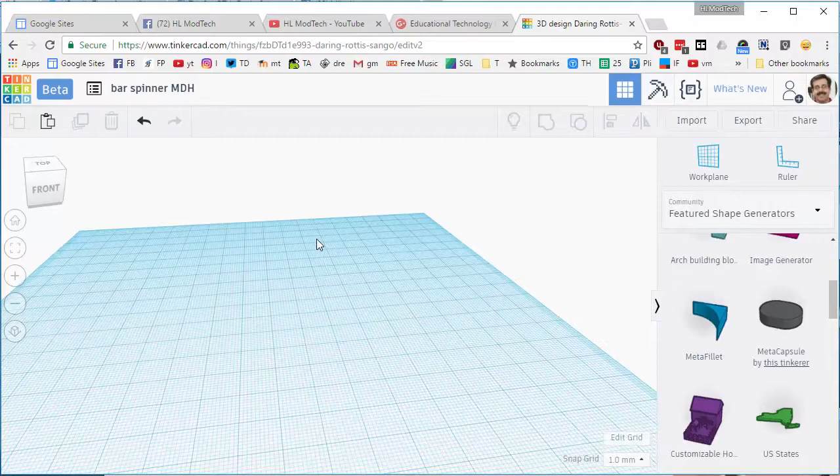Good day, Tinkercad friends. I want to make a super cool bar spinner super quick.

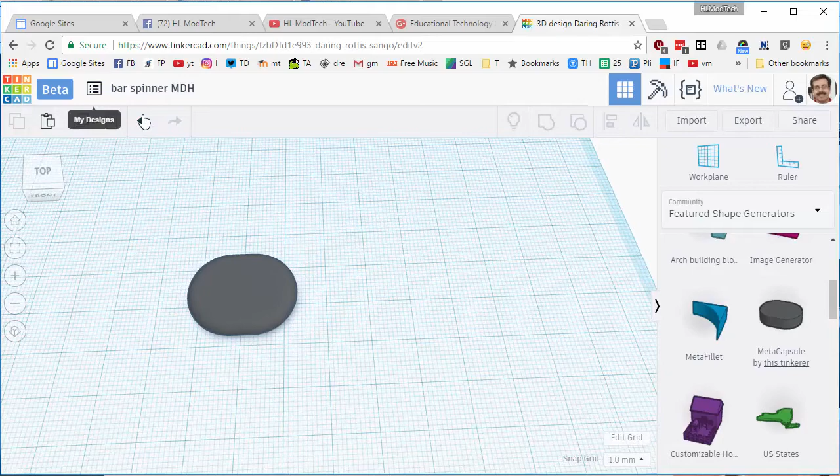Move to your featured shape generators and grab the meta capsule. When you bring that little fella out there, I like to make the bow be outward. I like to make it the maximum size of 2.5. That gives me a nice rounded shape to build with.

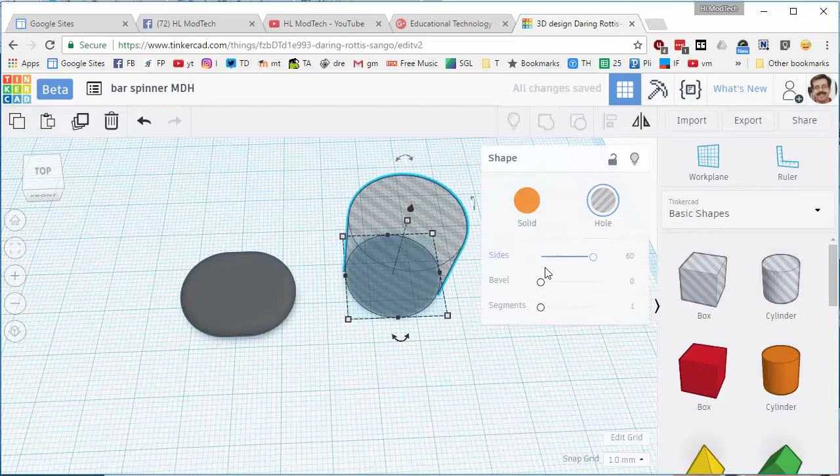And like I said, I'm going to build a bar spinner. I need to grab the hole. Remember, I like to use 22.3 for my holes. I find that works best with my PLA on all my printers. The bearings fit in real nice when I use this. Make sure you also switch to 60 sides. It makes it much more rounded, and that also helps.

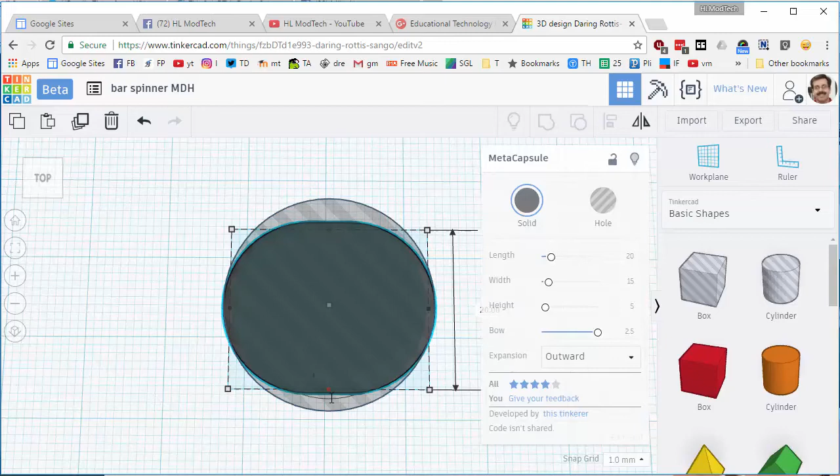I like to keep these 7 millimeters thick, and then if we take these two items and we center them, pop, pop, and view from the top, we can tell that our cool little bar needs to be a little bigger. So I just clicked on the edge, so now I can see these little squares and I can stretch him out so that he still looks quite nifty, keeps his rounded shape, and is going to totally enclose that hole.

I'm going to at that point do center center. That looks really cool. It's exactly what I was looking for.

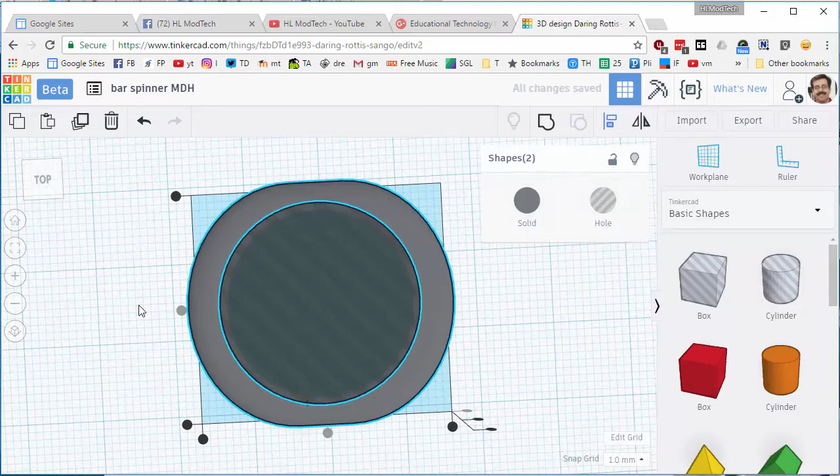And then, to make my bar spinner, I'm going to look at this from the top. Fit to view, top view. I'm going to grab that and I'm going to duplicate it.

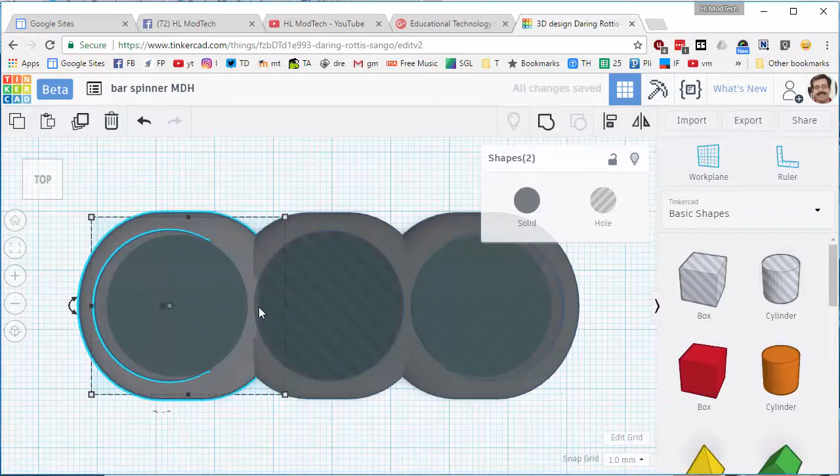And when I nudge this over, I can pick how I want it to look. Now I could overlap it as much as that, and I do kind of like that. I'm going to click back on this chunk and do Control D again, and I'm going to nudge it to that same amount on the other side, making sure that there is a gap between them. So there is a gap between my bearings, but it's going to be a nice, compact, and awesome spinner.

At that point, I can grab the entire critter and group it and take a good look at my spinner, pick a cooler color, give it something snazzy to look at. I do need to make sure that it is 7 millimeters thick.

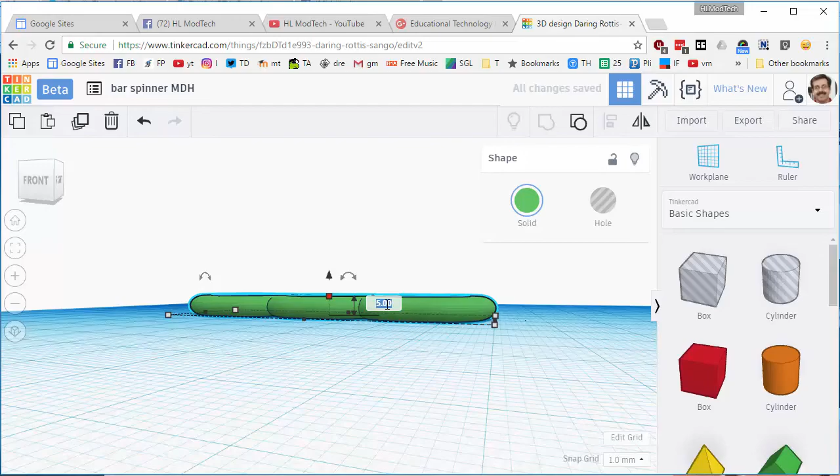That still looks awesome. That's exactly what I was hoping. And then I want to put my initials out here just because I think it's real cool when the spinner is actually connected to my name.

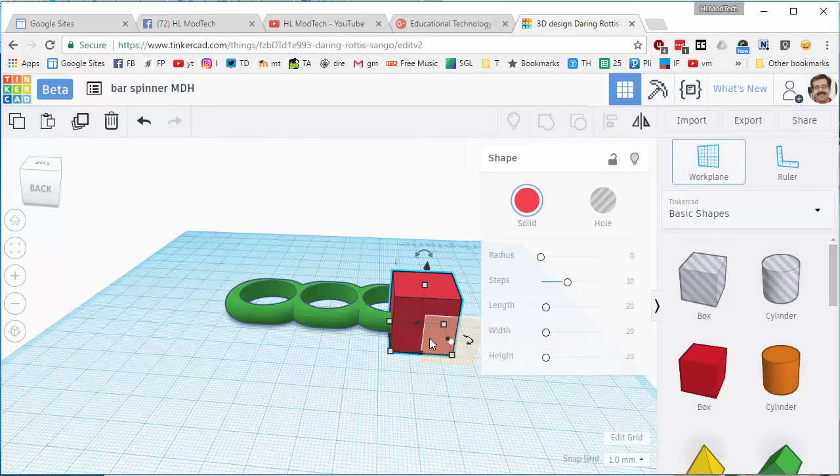I want my initials to be flat, so I'm going to bring out a piece of a block for just a moment. I'm going to press W to put the work plane on the front of that block. That way it's going to be flat with my spinner. Bring out my text, and I'm going to just put MH.

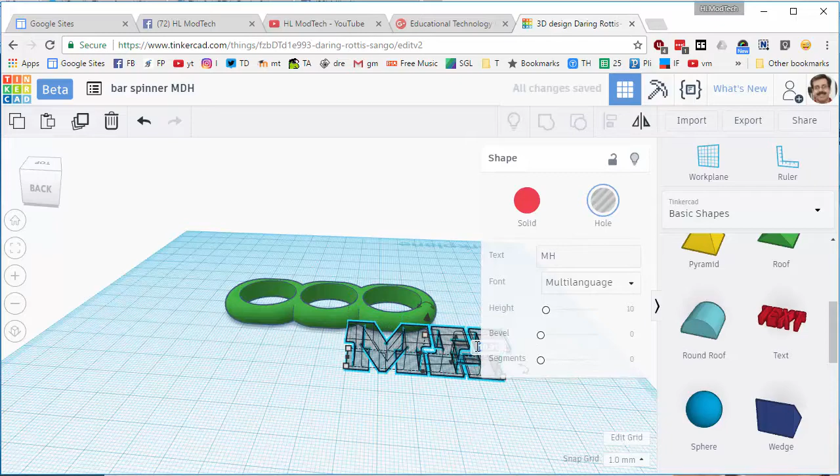Turn that into a hole, delete the block, press W to get rid of the work plane, click on my letters and shrink them down to 5 millimeters thick because my whole spinner is 7 millimeters.

And then I'm going to lift it up 1 whole millimeter, so it's going to be in the center, because 5 plus 1 plus 1 is 7. And now I'm going to make my MH so it fits on the center of my spinner.

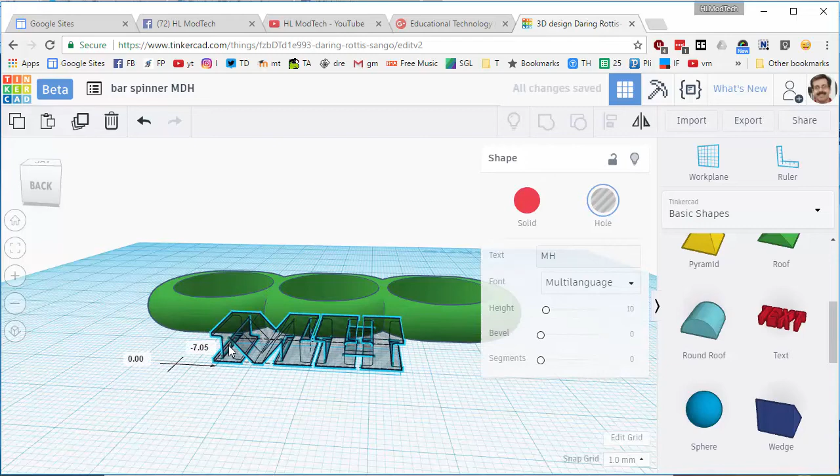Go to the top view, and this way I can nudge it along so that I'm happy and stick it in 1, 2 millimeters, maybe even 3. I'll zoom out 1 and make sure that's not poking all the way through.

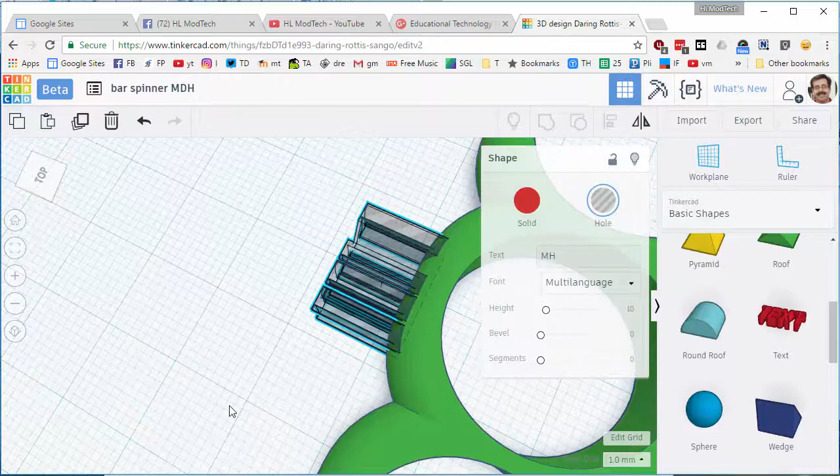That's fantastic. I can click Shift and I can align and I can make sure it's centered. And then when I group it, I will have a custom spinner that also has my initials.